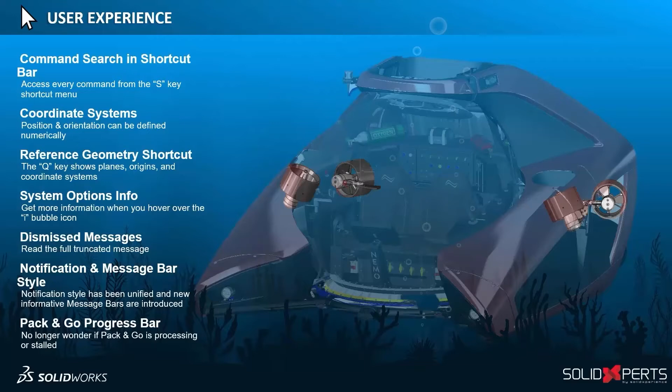We're going to kick it off with our very first topic, which is user experience. There are a bunch of good enhancements for user experience, but most of it is focusing on ease of use, frequently used functions or shortcuts, and providing the user with more useful feedback.

With recent improvements, SolidWorks 2022 helps you be more productive with thoughtful user experience enhancements. As we had seen before, the Nemo submersible isn't complete without all 4 thrusters mated in place.

In SolidWorks 2022, the command search is now integrated into the S key shortcut menu rather than the top right-hand menu. Additionally, if you click the eyeball, it shows the exact feature location.

In this example, the position and orientation of the thrusters has been precisely calculated, so mating to a coordinate system would actually be a really good strategy. In SolidWorks 2022, coordinate systems can also now be defined using specific numeric values, which makes the placement of the second thruster on the bottom right much easier.

At this time, origin visibility is currently turned off, to reduce overall clutter on the screen. But with SolidWorks 2022, the new Q key keyboard shortcut allows you to quickly turn on the assembly or component reference geometry, such as planes, coordinate systems, and origins.

It's also worth mentioning that coordinate systems have visually and functionally changed as well. Their axes, planes, and even the point itself can now be used to create sketches, section views, and more.

In this case, the thrusters need to be mirrored, and commonly used tools like Mirror are conveniently added to the shortcut bar with one click. The new Q key shortcut also works while creating features.

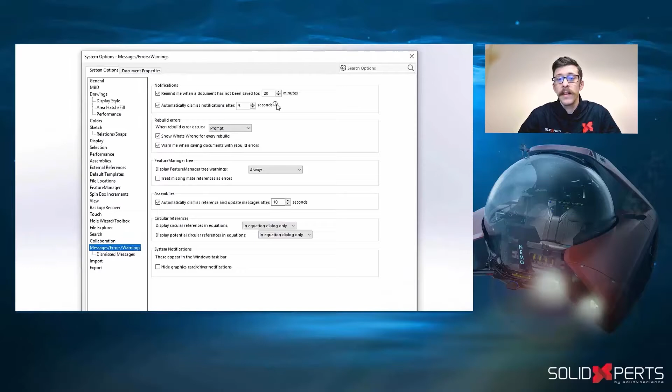You might have seen this before, but the dismissed messages have always been easy to show again, but were sometimes truncated or shortened. Now when hovering over an item, it reveals the whole message, making it much easier to determine if you'd like to show it again. Notification pop-ups like this reminder to save have also been unified in style and appearance.

When you need to collect a project and all of the reference components, the best tool for the job is Pack and Go. In 2022, you can now see a progress bar giving you an indication as to how long the process will take, which is especially useful for those larger assemblies.

And there we have it. As SolidWorks has emphasized, the most user-friendly 3D CAD software in the world is now even easier to use with these valuable additions to the user experience.

As mentioned in the video, the notification and message bar styles have been unified. So you can see the style of them now looks similar. They don't look so out of place. There are also some new messages.

The ones that we're pretty familiar with are things like save reminder - the document hasn't been saved for 20 minutes - or add-in loading performance, maybe you have CAM or another program that is going to take additional time to load.

We're pretty familiar with those, but there are new ones, or at least new to me, like solids and surface bodies - the data migration tab might help you edit this model. Or even the graphics body - the mesh modeling tab might help you edit this model. That one I know for sure. Graphics bodies are actually far more useful than you think, and the mesh modeling tab is a good enhancement. I would definitely recommend trying that.

Now we do have a couple other topics to cover. Hybrid modeling is going to be our second topic here, and when we look at hybrid modeling, it's now focusing on using more than just native SolidWorks data. It's now incorporating other file formats, and rather than just staring at the obscure BREP data or those mesh files that you have, you can use it as a reference and actually start modifying and using it within SolidWorks. Let's get into our next slide and show a quick video.

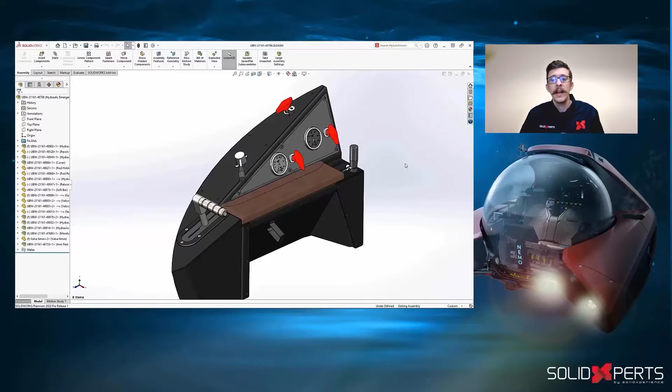Let's talk hybrid modeling. Designers require the ability to create manufacturable products using an ever-increasing variety of file formats. Now, SolidWorks 2022 makes this easier than ever with new enhancements for mesh BREP formats and tools that help you view and edit critical product information.

Now let's take a look on the top here. This ball valve on top is equipped with a lockout tag feature, which is perfect for this control panel, but the handle is too plain to be incorporated into a luxury product like the Nemo, right? I mean, this is some fancy stuff.

The particular supplier provided their files for the valve in mesh BREP format. In SolidWorks 2022, working with these files is just like working with native geometry, thanks to the new hybrid modeling capabilities. Creating features like chamfers, extrudes, reference planes, and more no longer require intermediate bodies or Boolean operations. It is now direct.

Now, in this case, the handle needs a slot for a lock, and new in SolidWorks 2022, the hole wizard slot length can be defined by arc tangents or centers. And when positioning the slot, the tab key toggles between vertical and horizontal orientation, so this is nice and quick, it's much easier.

Manufacturing the handle will also require a draft, and using bidirectional parting line draft would be the most appealing, and in SolidWorks 2022, you can now create draft in both directions when using a parting line, rather than having to create two separate draft features.

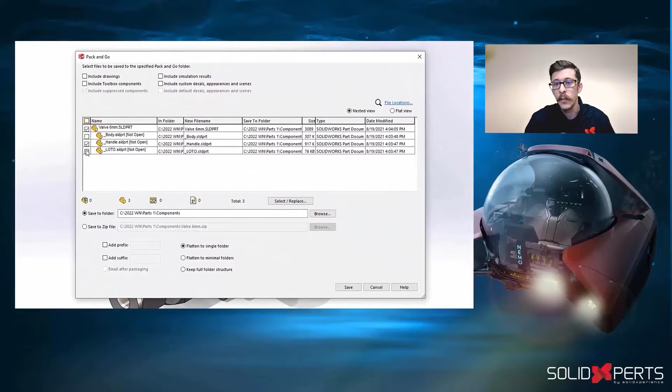Now, if we look at this mesh file, it contains 3 bodies, but the manufacturer needs access to the individual components. Now, in SolidWorks 2022, Pack and Go recognizes the references created when using the save bodies and split part commands. This way, you can choose which files you want without having to find them manually in Windows Explorer, which we know can be quite tedious.

Now, let's talk about section views. Section views are a great way to inspect components, but sometimes a suitable plane doesn't exist. Again, in 2022, you can now specify a section view from any cylindrical face, conical face, or axis.

Now, let's look at the part here. These are 22mm cut threads and are useful for rapid prototyping, but it's too much detail for higher volume manufacturing and would make the file large and complex.

However, the new stud wizard automatically recognizes the diameter of the boss, but still provides a list of different thread sizes and pitches to use. You can even create an undercut with full control over the dimensions and add cosmetic threads, and they can eventually be called out in 3D annotations or 2D drawings.

Again, good enhancements. In SolidWorks 2022, configuration-specific properties have been separated into 2 tabs, configuration properties and property summaries. In the first tab, property information is added just like you expect, but now you can choose which configuration they're applied to using the drop-down menu. And the properties summary tab provides a useful way to compare configurations based on a custom property.

Now, let's be honest, designers sometimes have no choice of the files they're going to receive from a supplier, but still need to support the design process through several different manufacturing methods. And again, that's why we like SolidWorks. SolidWorks 2022 provides the tools you need to get the job done fast and efficiently, while providing improved visibility to critical product information.

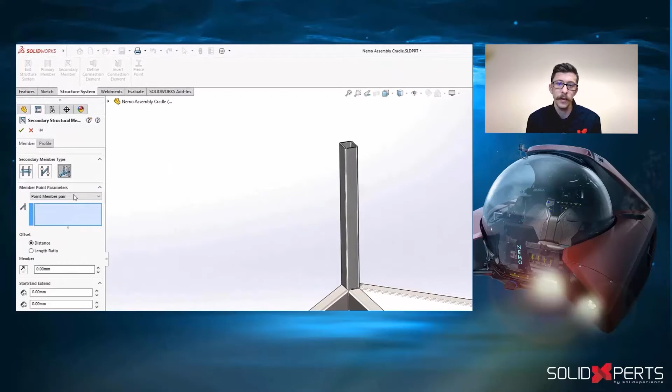SolidWorks makes it easy to create frames and structures with structure systems. Originally introduced in 2019, there is now a number of enhancements to secondary members, the introduction of connection elements, and more. Secondary members are defined using existing structural bodies, and this vertical post will be carrying a heavy compressive load and bending load, so it will need extra supports.

Creating multiple secondary members is fast in SolidWorks 2022, now that you can select a point in multiple bodies. All corner treatments are just as intuitive to define as they have been in the past, giving you full control over the end result.

Also new in SOLIDWORKS this year is the ability to define or insert connection elements. These are great for members that are designed to be bolted rather than welded. In this case, these legs right here require a base plate so that the cradle can be attached to the floor. Just select the member and the plate is automatically centered at the end. If the connection element doesn't meet your design needs, it can be adjusted on the fly.

These forklift lifting channels may need to be replaced if damaged, so a connection element is perfect for the situation. Defining the position of the connection element is easy. Simply select the faces of the members, then use the convenient member planes, which reveal themselves automatically, to center the element. The connection element is smart and can cut predefined holes in the members you select.

Gussets and end caps are also now supported for structural members in SOLIDWORKS 2022, and are just as easy to define as before.

Mirroring features and components is a very commonly used function, and now in SOLIDWORKS 2022, you can mirror across two planes or faces. No longer will operations like this require two separate mirror features. So for mirroring from front to back and left to right, you can now do that with two planes.

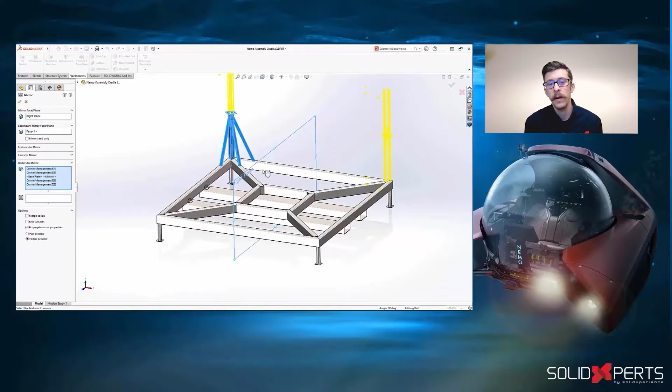In SOLIDWORKS 2021, they introduced the ability to create an edge flange on the circular edge of a non-planar base. But in 2022, this has been improved to allow you to edit a flange profile directly inside the property manager, so that you can specify the exact flange length you want.

And as we know, Structure Systems is a very powerful but flexible tool. With these new enhancements to secondary members, connection elements, mirroring, and sheet metal, creating frames and structures is easier than ever.

All right, that concludes Structure Systems. So we have covered user experience enhancements. We've also talked about hybrid modeling and the enhancements to Structure Systems. At this time, I would like to introduce my colleague Renee Forcier, who is going to teach us all about cloud modeling.

Thank you, Greg. In this next couple of slides and video, we're going to be talking about cloud modeling.

Innovation is the essence of product design and could be your company's biggest competitive advantage. It requires creativity, agility, and the ability to churn through concepts as quickly as possible. Parametric surface modeling delivers on creativity and agility, but the process is time-consuming, requires a rare level of expertise, and requires thorough planning.

Subdivision modeling, on the other hand, is spontaneous, requires minutes of training, and changes can be visualized in real time. Available on any device with an internet connection and compatible with your existing SOLIDWORKS workflows and tools, this tool meets every product designer's needs in one toolbox.

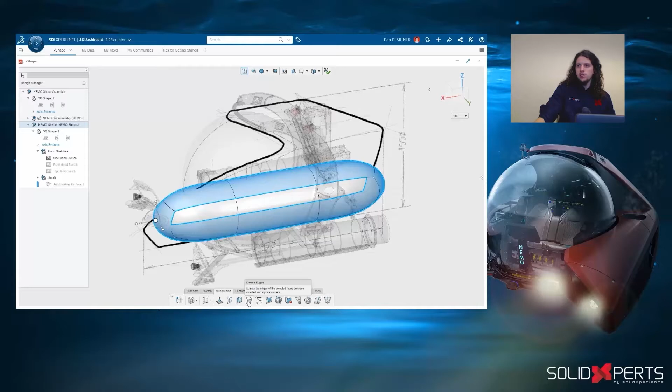By default, all of the faces on our shape have a C2 level of curvature continuity, ideal for any industry of product design. However, select edges can be creased at any time to enhance the style. In this case, by dragging the slider, Dan can adjust the smoothness factor applied at these creases. Because X-Shape runs in a browser, Dan is able to design on a tablet and can swipe his pen or finger across the screen at any time to influence the top row of vertices.

Now we can switch between orthogonal views to make it easy to size, shape, and position this first sub-D bottle right where we want it to be in relation to our frame.

The robot can then be repositioned onto an edge. This way Dan can precisely control the direction of his translation. Precision can be applied to the length of his translation too, as an on-screen ruler appears to snap to an exact dimension.

Once one side is done, Dan's ready to move onto the hood. To add more material, he can slap a virtual chunk of clay using the extrude command to the top of this body.

Once he's extruded that chunk of clay on top, he can pull the faces over the center plane. That plane can be used to apply symmetry, and as long as the symmetry option is active, all modifications will be replicated to the other side of the part.

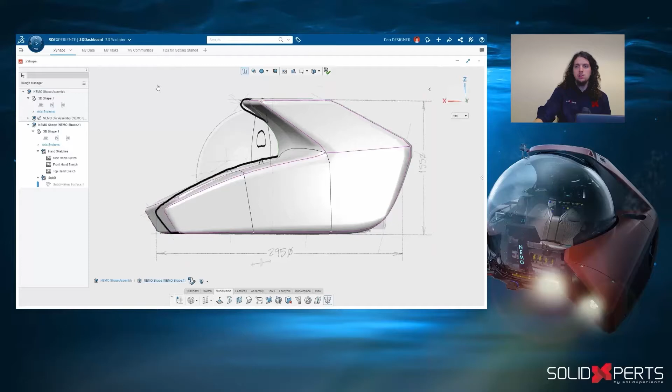To ensure the hood of the Nemo is perfectly flat, Dan can align the entities to a line, moving its endpoints with translate, and scale the entities while snapping them to a perfectly horizontal orientation.

Now that the general shape has been roughed out, Dan can focus on a few finishing touches before sending this out for review. Here he'll add two additional horizontal loops to the midsection to make way for a hole that will travel through it.

Because loops are such a common command, they're easily accessible from the in-context toolbar, a user interface feature every SOLIDWORKS user can appreciate. The vertical loop will provide a boundary for the hole in the back, as well as a scoop on the bottom to create the hole. The bridge tool can be accessed from the context toolbar while two opposing faces are selected.

In minutes, Dan has enough detail to share his concept with the rest of the design team. The sub-D modeling capabilities of X-Shape provide the fastest way to conceptualize in 3D, and considering the amount of information communicated by a single 3D model, it's arguably faster than sketching on paper.

But what about SOLIDWORKS? What happens when the reference frame assembly is modified? Let's check in with Don as he continues to make progress on the desktop connected to the 3D Experience platform.

All of Nemo's design team's data on the cloud is accessible directly in the SOLIDWORKS task pane. To ensure Don's changes aren't overridden by a collaborator, he can reserve files that he plans to modify, as we'll see in a moment.

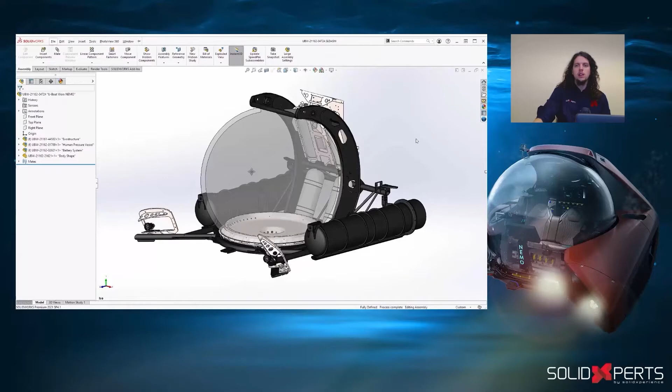Searching through their entire database takes seconds before he finds the components he's looking for, then all it takes to add them to his assembly is a simple drag and drop.

After adding the propulsion system and hatch assemblies, he's ready to save his changes. Just like that, all of his modifications are securely stored to the cloud, accessible to anyone with proper permissions anywhere in the world.

Curious about Dan's progress, he can perform another search for the body design. Even though it was designed in X-Shape, Don can drag it right into his SOLIDWORKS assembly and do a quick visual check on how his recent additions might influence Dan's design.

By activating Preview in 3D Play, Don can sketch some annotations to indicate the adjustments needed to account for newly added components. Then he can post them directly to their private design team community for Dan to see.

Even though Dan still has some work to do, it's not too soon for Don to add some SOLIDWORKS features to the body. X-Shape geometry comes in as flawless watertight solid, ready for extrudes, fillets, shells, ribs, and any other features necessary to prepare this product for manufacturing.

The 3D Experience platform unlocks many new capabilities in applications like X-Shape, and they're all capable of collaborating with SOLIDWORKS. The best part is they now enable hybrid workflows, allowing you to stay in sync while working concurrently.

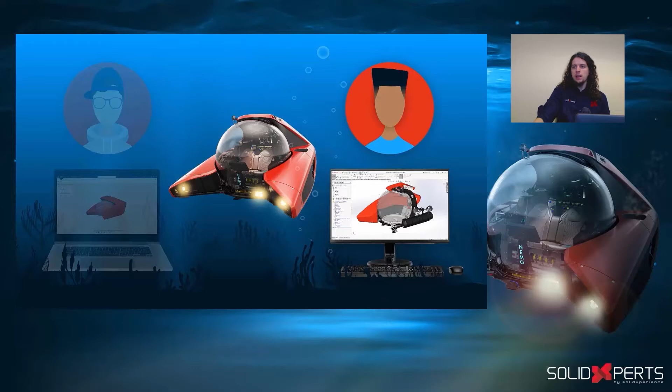Designing in X-Shape can go far beyond the concept stage. Let's drop back in with Dan as he revises and finishes the body shape to the highest level of precision.

As Dan's working in X-Shape, he receives a notification for Don's post. By clicking it, he'll be able to go directly to their community where he can review the proposed changes and let Don know he's working on it, as well as do a quick refresh of the frame assembly.

Once the refresh is complete, the frame is up to date with Dan's last design changes. The exact same assembly structure that exists in SolidWorks is visible in X-Shape, so Dan can start strategizing about his changes. To keep the design tree organized, Dan creates an ordered geometrical set to house his reference sketches.

By converting the outer diameter of the hatch opening, he'll have a clear view of the edge he needs to blend the opening of the hood to. Rather than adding a loop of vertices surrounding the entire perimeter of the body, Dan can localize groups of entities with a subdivide command.

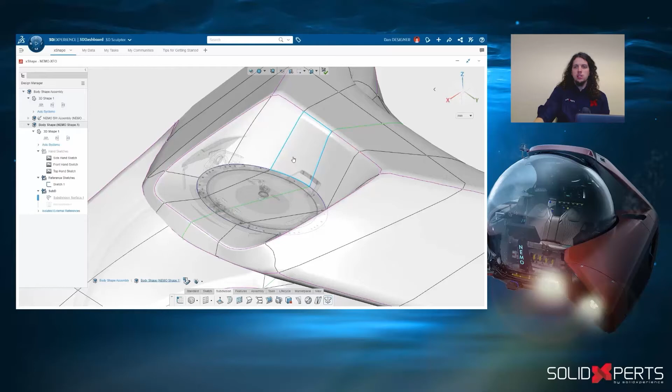Now that he can select a new loop of edges on the hood and the corresponding edges of the hatch, magically, the Align to Curve command perfectly aligns Dan's X-shaped geometry to Dan's SolidWorks assembly. Just like style splines in SolidWorks help to parametrically control splines, the cage view in X-Shape reveals the underlying constraints driving the curved surfaces, making it apparent when edges are out of alignment.

After selecting the vertices in sequence, Dan can easily align them to each other. The side view reveals that the front faces of the hood are also out of alignment. Once selected, they can be made coincident to each other from the context toolbar, just like mates in SolidWorks.

To hone the angle of the front faces, Dan can select the entities and reposition the robot to the pivot point. If the face required a specific draft angle, Dan could snap the on-screen protractor to dial it in perfectly.

To leave the coincident faces undisturbed, Dan can once again reposition the robot accordingly. Dragging the webbing of the robot will ensure that translations maintain the coplanar alignment of the faces.

After a few more adjustments to the hood, Dan is ready to tackle the pathways on the side of the design for the thrusters. He'll prepare a set for each one, not just for organization, but also to serve their dependency on the order they exist within the design tree.

Using the cylinder shape and automatically creasing each end will make it easy for Dan to locate the first pathway in relation to the vertical thruster.

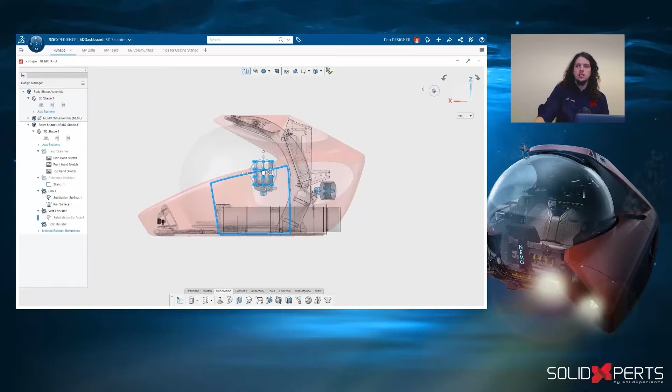In a similar fashion, Dan duplicates the process of modeling the negative space required for the horizontal thruster. There are now three separate solid bodies that can be combined to form the final shape.

Similar to SolidWorks, the combine feature has multiple options for Boolean operations. The subtraction looks good, but Dan also notices the intersection between the vertical and horizontal pathways is a bit too high.

To remedy this, Dan will need to lower the vertical pathway. Because each body was placed in a separate set, Dan is still able to see the horizontal pathway even though it exists below the vertical pathway in the design tree.

This allows Dan to predictably position the vertical pathway in relation to the horizontal pathway with no trial and error. This looks perfect. Taking one final look at the overall shape, Dan's job appears to be complete.

We will now be jumping back to SolidWorks. The model has been updated, and Dan has made further progress on the frame, on the parametric features. He's even split the body into multiple components using the master modeling technique. It won't be long before this project is wrapped up.

X-Shape provides an unlimited amount of design freedom and flexibility, but you can use it to design much more than a concept. When necessary, it's capable of precision fit for any downstream operation. The sub-D modeling environment is one that every product designer can benefit from.

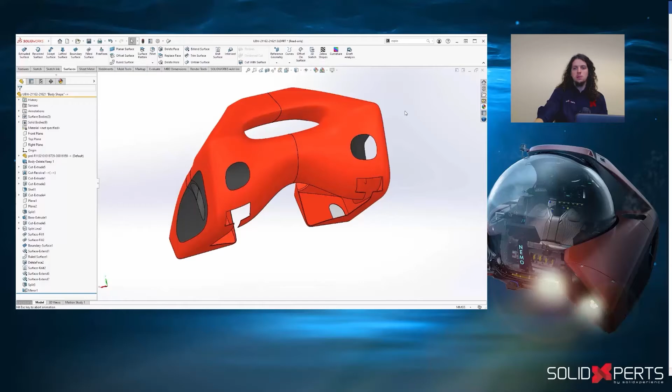There's no installation required, almost no training necessary, there's no faster way to model complex geometry, and there's certainly no reason not to expand your design capabilities with this great new tool.

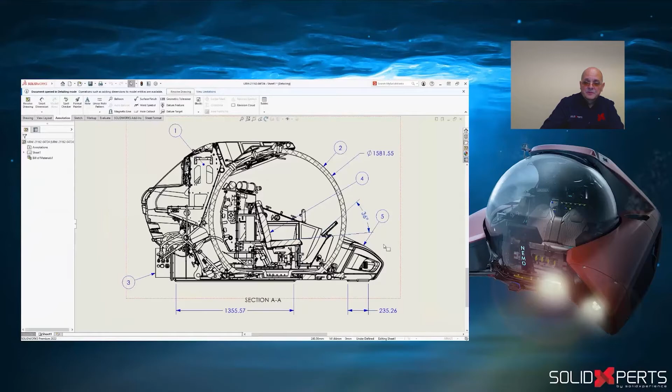Also from improvements here, on the feature tree we can choose to open any of the sub-assemblies in any mode we like, be it large design review, lightweight, or fully resolved. And later on, should we change our mind, we can absolutely activate fully resolved mode at any point. SOLIDWORKS 2022 makes it easier to work in as efficient a mode as possible, no matter how you start out working in your assembly session.

Similarly, in SOLIDWORKS 2022, assembly features are also improved. Mates, patterns, and configurations are all easier to use than ever before, with more functionality and less clicking by you, the user.

Here, with our Instant 3D turned on, it is much easier to manipulate one of the components, even though it's obscured by the other pieces in the assembly. Once we start clicking and dragging it, we can see the motion triad, and we can reorient it in any angle or orientation we choose, easily from the left and right mouse buttons.

Also, upon mating it, the Smart Mate toolbar or Quick Mate toolbar has more complete options so that we can do everything right at the mouse cursor, even adding lock concentric on these particular items. With a control drag, taking another copy of that stud, we can now move it into position and again orient it however we need and fully lock it down as needed.

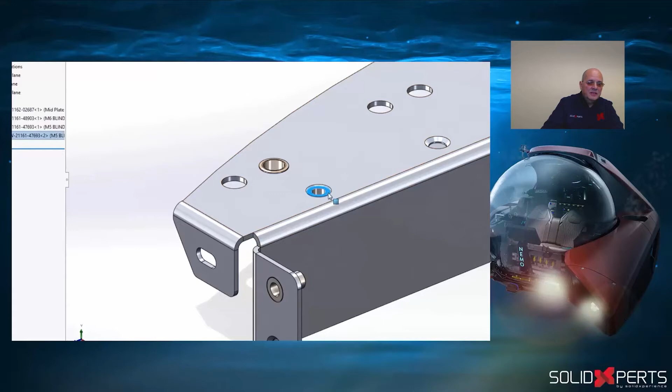Also, when it comes to pattern-driven component patterns, they're even more intelligent than they ever have been before. Here, it automatically interprets the appropriate seed position and finds the remaining instances and where they should go. Even if we relocate this particular component to one of the other instances of the feature pattern, the component pattern automatically adjusts and corrects itself for the seed position. Similarly, on our countersunk fastener, it works the same way.

Configurations have always been a powerful feature of SOLIDWORKS, and in this assembly or subassembly case, we have configurations not only of the subassembly itself, but also several of the key components. And the myriad of choices that become involved could get quite time-consuming to maintain and categorize.

Now for SOLIDWORKS 2022, we have the best of both worlds, combining design tables and configuration capabilities into a new configuration table element. This configuration table automatically picks up on the existing configurations and, with a few simple clicks, allows us to create a complete new variation of that config without having to activate or do anything else.

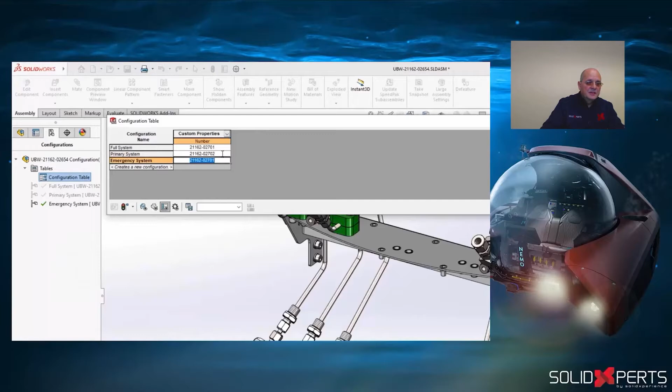Even if we choose to make manual changes to a particular config, whichever one happens to be active at the moment, those changes in turn automatically populate themselves into the table. Also, for configuration tables, we can filter by specific items, and in this case, make sure that each configuration has its appropriate part number.

Similarly, when looking at bill of materials, there are often cases where we might have specific items, particularly pieces formed at assembly, that should not show up in the BOM. Previously, you could always go in and, component by component, tell it not to be in the BOM table. But now in SOLIDWORKS 2022, we have a new configuration option at the component level to determine that it should never be applied to an upper level BOM.

SOLIDWORKS 2022 makes it much easier than ever before to deal with large assemblies and variations of large assemblies in your software, giving you more time to design and less time to worry about how the aspects of the software work.

One note about the Quick Mate system: there is a system option that needs to be activated to turn on some of those additional options for locking and setting your particular mates.

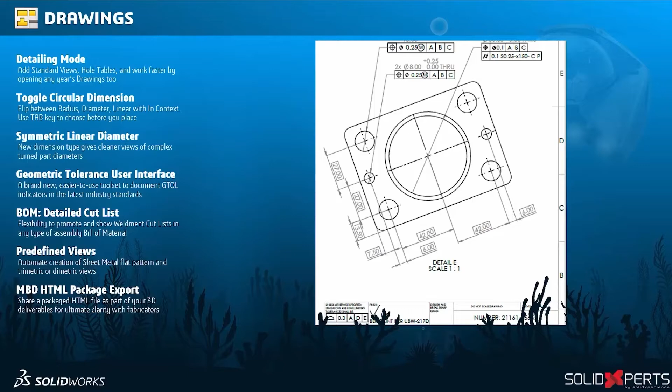As alluded to previously, drawings also get significant enhancement in SOLIDWORKS 2022. Detailing mode continues to evolve, and new types of dimensions and bill of material options have been added this particular release.

For the Nemo submersible, companies like U-Boat Worx need to make their drawings as full detail with the least amount of effort as possible. Here in detailing mode, the full assembly is well documented, even with shaded views and more. We can bring in additional notes, even in this detailing mode, and choose to edit those notes, adding extra intelligence to our drawing.

Adding a few missing balloons and realigning them is easily done, with none of the solid body information being required. Even addition of tables and stuff from existing views works just as you would expect, even if you had the drawing fully resolved.

Older drawings can now open directly into detailing mode in SOLIDWORKS 2022. This replaces the prior detached mode of earlier releases and gives you all the functionality that detailing mode can bring.

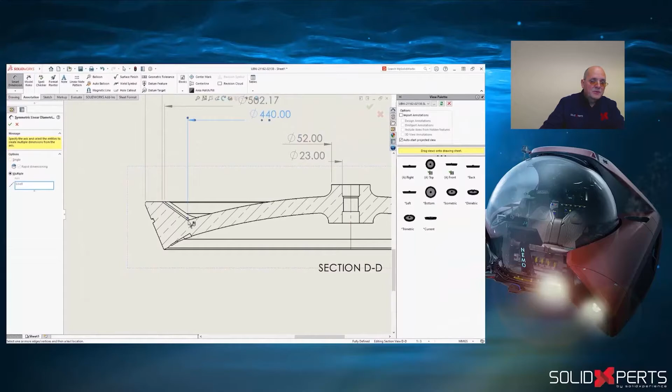The in-context toolbar for drawings is also improved, in this case allowing us to alter our diameter dimension style directly on the fly, not needing to refer to the property manager. On a large turned part, symmetric linear diameter dimension gives us a clearer overall picture with less leader lines and so forth, making for a much tighter drawing view.

Geometric tolerancing has been completely reworked for SOLIDWORKS 2022. We get an in-context property manager right at our mouse cursor, allowing us to build up the frames in full detail, section by section, from symbol to tolerance to material conditions and datums, all interactively on the fly right at your mouse cursor. This will make it so much more efficient to add good geometric tolerancing into your drawings with less time.

In this frame assembly, we actually have a series of weldments fastened together. Each one has its own very detailed cut list. However, in this particular case, it would be nice to have all these combined at a subassembly level type bill of materials. Now with SOLIDWORKS 2022, we can do exactly that with the combined roll-up of those details.

Predefined views have always been useful in drawing templates, and now for SOLIDWORKS 2022, sheet metal flat patterns are available as a predefined view type that you can put in your drawing templates.

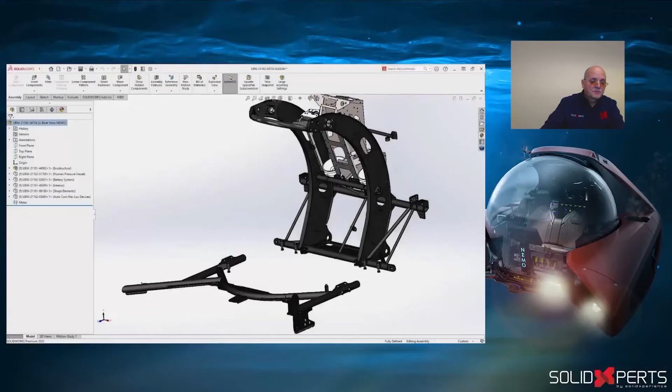SOLIDWORKS 2022 makes it easier than ever before to fully document even the largest assemblies in all the detail required to make good manufacturing work done.

As I've noted before, detailing mode really does completely redefine what an actual drawing view is, and even for less involved assemblies, I absolutely advise you to take advantage of it. The speed improvement is fantastic for what it can do.

An additional note: detailed cut list is now available in SOLIDWORKS 2022 for each of the BOM types, whether it's top level, indented, or parts only.

SOLIDWORKS has long been one of the most capable CAD systems in terms of file import and export, and that tradition continues with SOLIDWORKS 2022.

In SOLIDWORKS 2022, IFC import and export are both improved, DWG and DXF export from files are improved, and overall import performance is much better than previous releases.

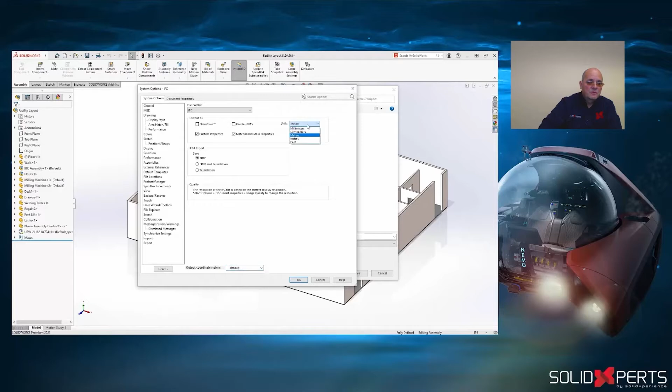In SOLIDWORKS 2022, you may collaborate with a variety of engineers, project consultants, and others not using your CAD system. IFC file format is created with more capabilities, allowing us to set specifics to match our partners' specifications. Similarly, on the import side, now for SOLIDWORKS 2022, we have more options for IFC import.

We can now filter by the various object types that might be in the file, particularly for a SOLIDWORKS designer, perhaps choosing just the floors and walls of a building to bring in and design our equipment around. All of this means that the resulting import and opening in SOLIDWORKS is much faster than it had been in previous releases.

Now with 2022, exporting DXF and DWGs directly from part files is improved, giving us some of the capabilities that were exclusive to drawings before in picking up layers, colors, object types, and more, and properly assigning those to the outgoing DXF or DWG file.

Oftentimes in manufacturing, we'll pick up those DXF files and use that layer and color information to properly suit their needs.

SOLIDWORKS 2022 makes it easier to collaborate with others throughout your workspace, be they partners, your own manufacturing team, or anyone else involved.

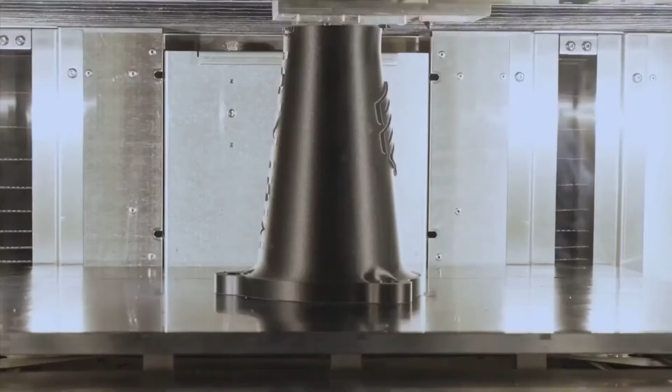Graphics performance has been improving in SolidWorks for the last several releases, and that tradition continues with SolidWorks 2022. Lightweight graphics, cosmetic threads, 3D textures, and silhouette edges all see noticeable improvements with SolidWorks 2022.

At any point in the design timeline, appearance changes can occur. Now in SolidWorks 2022, these changes propagate themselves to the graphical display no matter how the file is opened. In this case, a lightweight component, even though it has just minor appearance changes, switches over to resolved such that those changes are more visibly apparent.

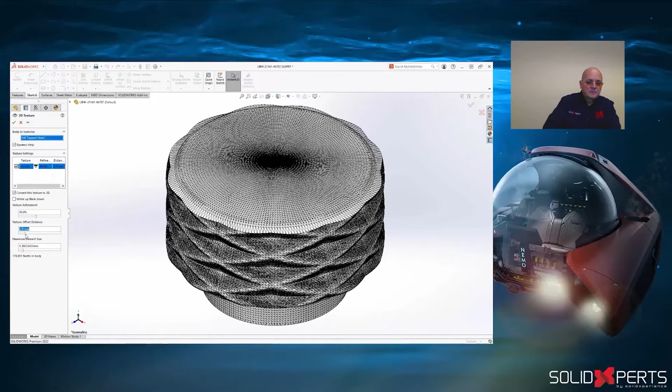Several releases ago, SolidWorks introduced the ability to take a 2D appearance and map it into a 3D texture. SolidWorks 2022 can now very quickly adapt those textures no matter how you choose to modify them, giving you overall better performance in both the 2D and 3D texture modes. These textures are great for 3D printing and other purposes, or even just general renderings.

Also in SolidWorks 2022, the cosmetic thread texture feature is greatly improved. It's a more realistic looking thread and makes use of your graphics performance. Whether those threads are external or, in the case of a hole wizard feature, internal, they look great in either situation.

Also, silhouette edge is now rendered by your GPU rather than your CPU. And so in SolidWorks 2022, the frame rate increases significantly, giving you both better visual and speed appearance as you work with your large files. No matter how you choose to work in SolidWorks 2022, performance will be noticeably faster.

SolidWorks has had administrative images as a deployment scheme for quite some time, and in SolidWorks 2022, the options for these have improved. We have additional image types that can be distributed, nested groups therein, the ability to distribute the vault view directly, and improvements on the electrical install options for your individual clients.

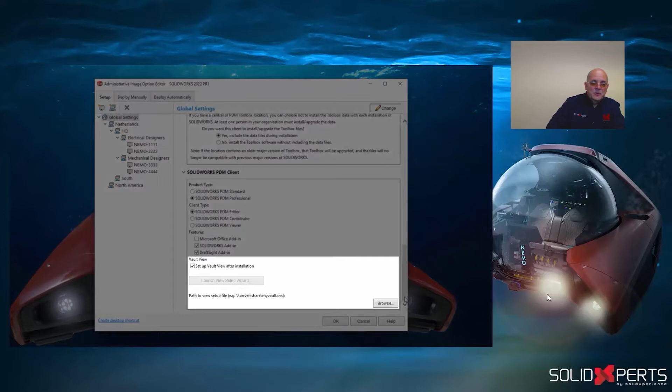In this example, there are a number of utilities that most of the team does not use, and we can clear those off. However, we do want PDM set up, and now for SOLIDWORKS 2022, we can have the vault view created at the conclusion of the admin image install. No more needing additional scripts to run on your own. It's all part of the original admin image.

Also, on the electrical side, it is more clear when you do make the choice now for an admin image as to what setup of electrical that you're actually getting. In this case, the client-only distribution. Many firms have collaborative electrical setups, but otherwise standalone individual SOLIDWORKS clients.

Whether you choose to deploy automatically or manually, both options are still fully supported with the new admin image types. SOLIDWORKS 2022 makes it much easier to create image types that are more suitable to however your team might be working.

In actuality, you've been seeing some of the enhancements for SOLIDWORKS Visualize all throughout this presentation. Everything graphically displaying the renderings of the U-Boat Worx Nemo submersible was in fact produced with SOLIDWORKS Visualize 2022. Let's take a deeper dive into each of those enhancements.

SOLIDWORKS 2022 Visualize allows for a matched camera utility, improved shadow catcher, improved patterning, grouping, and more. For a high-end commercial product such as the Nemo submersible, marketing animations and renderings are key to the sales capability of the product.

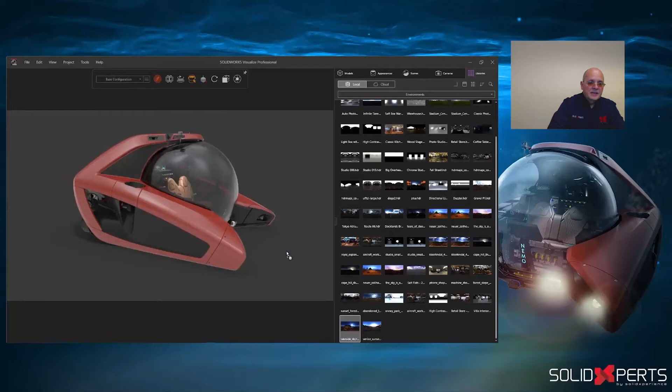HDR environments have been part of Visualize for quite some time. And when we put this scene in around our submersible product, the lighting for the beach scene looks really good, but the background is not exactly appropriate for the use. Here we can find an appropriate 2D image from elsewhere and make that the new backplate for the scene.

Normally, aligning the camera of the 3D model versus the perspective angle of our backplate would be a rather troublesome trial and error process. Now with Visualize 2022, we have a match camera utility, and with a few guidelines to reference the perspective and horizon found in the 2D image, Visualize matches the camera for the 3D model to align with that of the 2D backplate.

Now it's a simple matter of rotating the HDR environment to try to line up visually the shadows of our 3D model with those seen in the 2D image. This works quite well. However, notice that the shadow for the model extends through what would be the wall of the ship.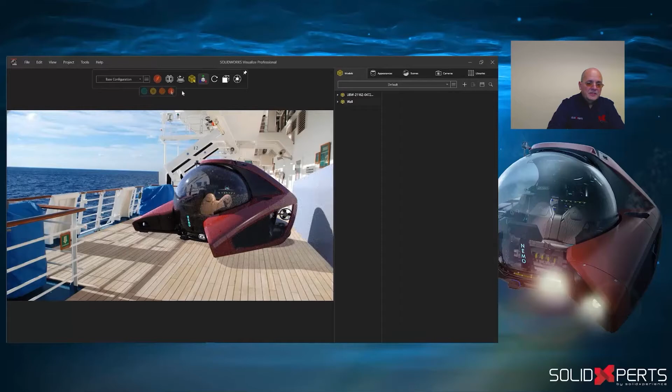Fortunately, in SOLIDWORKS Visualize, we have some reference geometry, in this case a wall, that we can put to catch that shadow. Here we create our primitive, align it, and then position it such that it can catch the shadow, then turn around and enable that as a shadow catcher and hide that geometry from the scene.

The finished result is a nearly ideal merge of our 3D model and 2D scene with HDR environment.

Now, ideally, it's desired to put the Nemo in its destined environment, in this case under the water. And we can easily do that with SOLIDWORKS Visualize by adding a configuration, keeping all those scenes in one single Visualize project.

Here we adjust the lighting thereof, and now we go about populating the scene with some accessory objects.

Previously in Visualize, there had to be at least a couple of instances otherwise defined in SOLIDWORKS or a CAD system to get effective patterns. Now in Visualize 2022, even just having a single accessory object, we can do the patterning entirely in Visualize. In this case, for a school of fish, a scatter pattern is probably more appropriate than anything else. And the end effect looks fantastic.

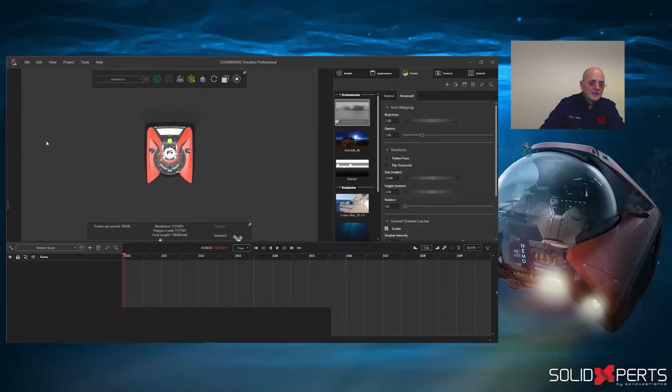Now for the third rendering in our project, we have another configuration. And as we add the cameras, we can start building a timeline of the scenes.

Here we start applying the explodes, and as we do so, additional keyframes get added. Previously, the more objects you had, the more keyframes, and it gets harder and harder to manage. Now in Visualize 2022, we can actually start color coding some of those keyframes into groups that are easily visible on the timeline and easier to control and manage the entire scene arrangement.

Continuing on, we can also populate the timeline with additional cameras. For a more professional effect, up to 3 cameras can be arranged easily to create a full perspective motion of our entire explode arrangement.

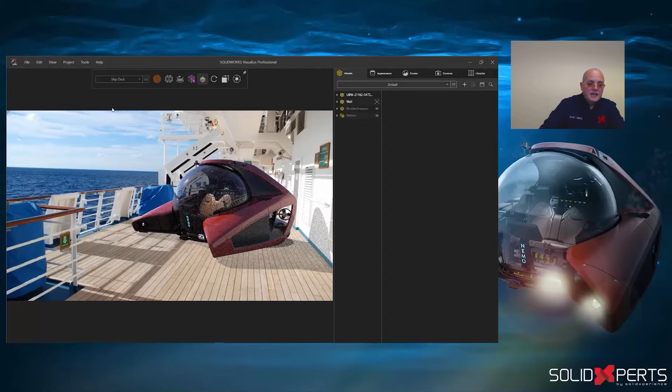With the sequence fully built up and all the cameras added, Visualize 2022 provides us the method to keyframe to each of the 3 cameras as needed, again producing a final sequence without needing any other additional video editing software beyond Visualize itself. Now going back through each of our project configurations, we can set about the task of the final render.

Now that everything looks good, Visualize can proceed on its own to do the rendering for us. Those render settings can be reviewed, and the projects can be canceled if needed. Best of all, the outputs are referenced together in the final project and can be viewed directly as entities in Visualize itself.

With all these enhancements in Visualize 2022, any SOLIDWORKS model, no matter how complex, even to the complexity of the submersible, can be turned into top-notch marketing collateral by anyone with capable SOLIDWORKS skills.

A few additional enhancements for SOLIDWORKS Visualize include better radius support, full display of the new cosmetic thread option from SOLIDWORKS 2022 itself, and the ability to pull in multiple motion studies from your SOLIDWORKS files.

Well, graphics and Visualize certainly show off some of the flashier enhancements of SOLIDWORKS 2022. Serious engineering improvements have also been made, and SOLIDWORKS Inspection for QA engineers and QA technicians is one of the product areas where that is more evident.

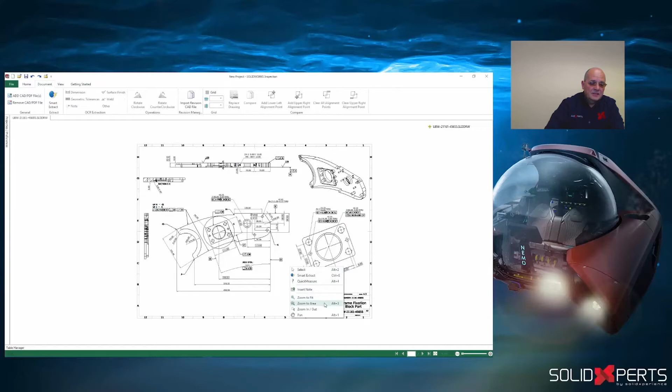Now in the standalone edition, we have the ability for new file types, both Unigraphics and native SOLIDWORKS drawings, no longer needing to do part of the project in SOLIDWORKS and part in the standalone app. Now things can be done entirely in the standalone app if desired.

Here we can use the Smart Extract and pull a lot of the information directly out of the title block, not needing to use the OCR techniques at all. Even the new geotolerance here in the title block gets captured in its entirety, frame and all, with all the relevant information and almost no typing on our behalf.

Similarly, as we scan about the drawing, we can pick up all callouts, the new geotolerance frames, even with tolerances and additional aspects, and it all comes through completely in the new SOLIDWORKS Inspection 2022.

Moving on, we can actually grab it in a single window, getting both of those elements as two individual characteristics in our characteristic list, quantity instances and all the other things that we normally expect to work perfectly well here in the standalone app. But in some cases, not all firms have completed drawings, and Inspection 2022 handles that as well.

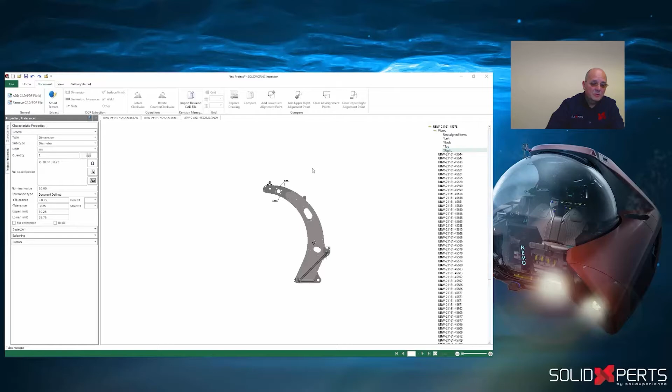For a more model-based engineering type approach, we can pick up these DimExpert dimensions and tolerances completely with the Smart Extract in Inspection Standalone. Even for a weldment type assembly, or any assembly for that matter, we can continue with the same approach.

And for completeness sake, if we're going to stick with the model-based definition type arrangement of model-based engineering, even from Inspection Standalone, we can output that as a 3D PDF, pretty much the same format as came in or would be expected from model-based definition add-ins.

So whether your models are complete, fully documented or not, you can handle it all with SOLIDWORKS Inspection Standalone. On the add-in side, here in SOLIDWORKS itself, a new complete full API has been added, and you can create your own macros to further enhance the automation capabilities and automatic report generation of SOLIDWORKS Inspection 2022.

So no matter what your firm's preferred documentation style is, full drawings, intelligent models, or some mix in between, there's never been a better time to consider adding SOLIDWORKS Inspection for customers that have SOLIDWORKS Premium, or perhaps even the original add-in SOLIDWORKS routing as an independent product. There are significant enhancements to look forward to in SOLIDWORKS 2022.

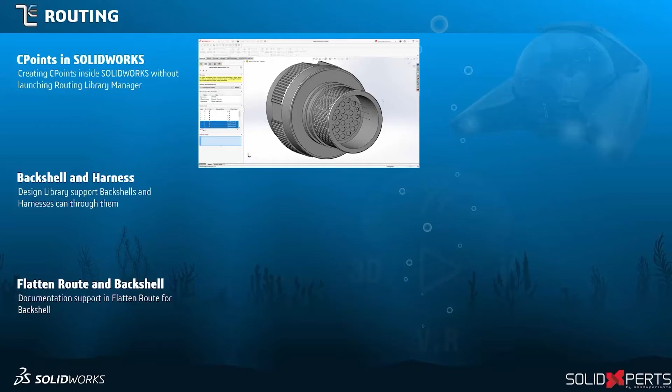With SOLIDWORKS Routing 2022, CPoints can now be created directly in the SOLIDWORKS window itself. Backshells and inline components are now fully supported, and of course Flatten Route now adapts to those inline backshells.

When taking something as sophisticated as the Nemo submersible underwater, electrical and other circuitry are a key part of the overall design. In SOLIDWORKS Routing 2022, we can take advantage of all that electrical information.

Now for this multi-pin connector, we can actually add some of the routing intelligent connection points using the information from the SOLIDWORKS electrical manufacturer part database. Here in this case, we can choose the manufacturer and component desired.

And referencing that data, we can now add our CPoints directly in the SolidWorks graphics window, selecting edges or faces as needed to get those terminals added.

At any later point, we can examine that information and clearly determine which of the pins in a multi-pin connector have been assigned so far. And we can continue on with the design process at any point we choose, adding the missing terminals wherever we want to, or whenever we want to.

More time designing, less time switching applications.

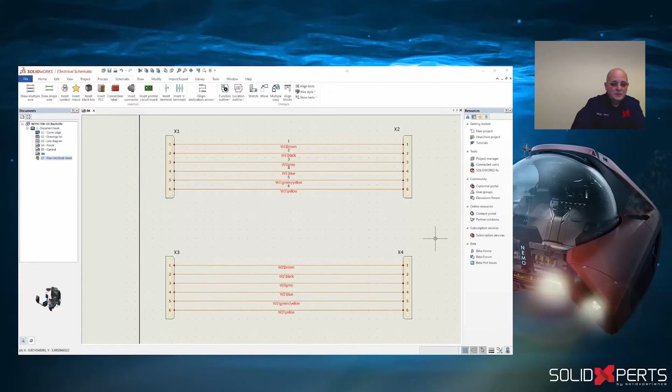Now, for protection of overbending of cables and things of that nature, backshells are often used. And now, even though they're not stipulated in the electrical schematic, we do have them available in the SolidWorks routing library.

Here in the Nemo design, there are actually a few of these routes that already have the backshells added to them. In this case, we're using a 45-degree bend backshell. Going to the design library, under electrical inline components, we can now select a variety of pre-made backshells for us and add those into our routes.

Even for routes that have already been done, we can adjust the route to take advantage of that new inline backshell. Here, even in this case, where the exit of the backshell is not directly collinear to the connector itself, we can adjust the route to handle that. Selecting that back edge, the route and spline updates itself correctly.

Furthermore, when it comes time to producing finished documentation for any of these routes, we can now use the flatten route utility and, choosing either of the routes, show the full flattened arrangement, including the inline backshells.

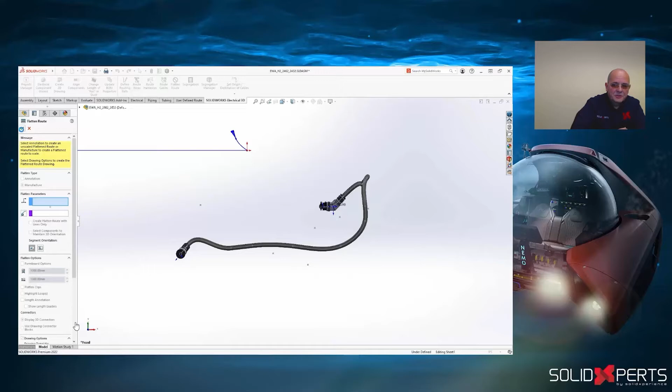In the Flatten Route Property Manager, we can choose the level of detail desired. In this case, the manufacturer part information and the 3D connector information, having it automatically self-generate into our finished documentation.

SolidWorks Routing 2022 makes it easier and more effective to do detailed routings, models, and finished drawings all easily within your SolidWorks. Also in SolidWorks Routing 2022, cable points can be created directly in the graphics window rather than using the library manager, as we saw with connection points, and bend radiuses for both cables and harnesses are improved. Along with the flatten route enhancements that we saw, better handling of external connectors has been made possible, and we can edit the flattened route segments before producing the finished drawing.

And for the schematic side of SolidWorks 2022, there are enhancements to the electrical schematic application as well. There's always been a content portal that we could activate in SolidWorks Electrical, but now it's more integrated directly in the software interface.

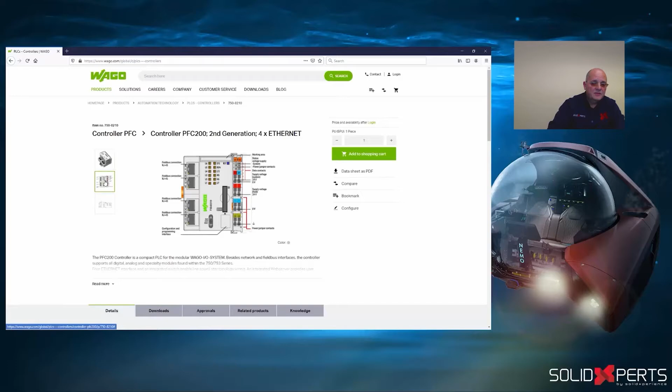Here we're looking at the original content portal, which normally launches just regularly in the web browser, any browser of your choice for that matter. And brands are adding new components all the time and new catalog specifications with additional manufacturer data.

Now in Electrical 2022, we can launch that content portal and have it appear as a panel directly to the right side of the software. Here we can search much like we would in the browser edition, and we can just browse for new content, or in this case, search for the manufacturer Wago as we were showing previously. Coming down to the PLC library, we can see that it has a variety of modules, whether as 2D symbols, footprints, or even 3D parts.

Although it may seem like a small enhancement, having this information directly at your fingertips in one application can make your SolidWorks designs more effective and easier to complete.

Additionally, in SolidWorks Electrical, we now have better control in a multi-user environment with more groups and faster operations. And in the electrical reports, hyperlinks can now reference more than one destination, making it much more usable in terms of referencing both inside and outside of your electrical schematic projects.

SolidWorks Simulation 2022 has a number of enhancements that become quite useful in the design of something as sophisticated as our NEMO submersible.

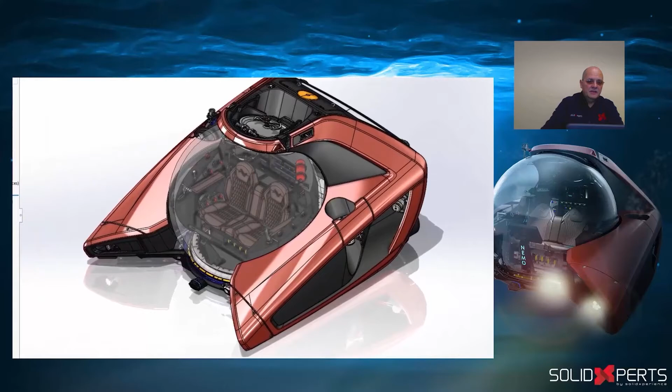Here in our NEMO submersible, there are a number of areas that are important to simulate prior to taking this into the open ocean. The framework of the NEMO submersible has a large number of bonded interactions, and those all solve up to 27% faster than it did even in Simulation 2021.

Now, at the top of our submersible, the important hatch has a hand wheel and linkage over toggle mechanism. It applies 500 newtons of force on the rim to get an adequate seal for diving. Thanks to the cyclic symmetry involved, we can divide that down to 1/3 of the original model and solve on that.

Furthermore, we can take out the purchased linkage rod and replace it with our new virtual connector. That new virtual connector has options for attaching to cylinders or vertices as needed, and we can have our attachment endpoints even be spherical ends, ball ends for the linkage rods as needed.

In this case, we'll specify our 2 pins where we're attached to, and we'll put a spherical end on the end conditions. Furthermore, we can even stipulate the section parameters to get it closer to the actual purchased item that we use.

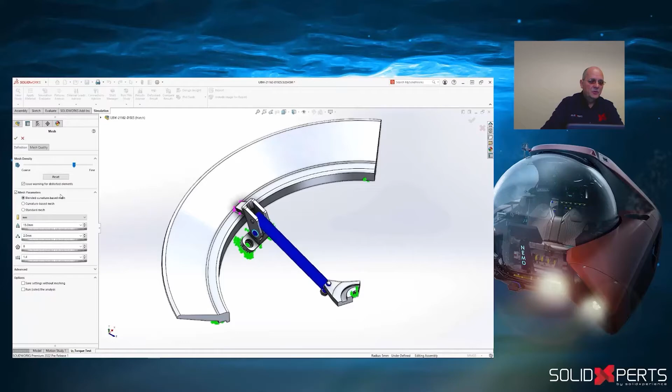We'll apply a torque to represent the action on the hand wheel, and we'll divide the nominal force applied by most people by the 1/3 that we have for the rest of the model. Running the analysis and looking at the results, we can look at the contact force exerted by the finger of the over toggle mechanism.

Now again, our desired minimum was 500 newtons, but this value times 3 isn't quite there yet. So with a choice of a slightly longer configuration of our over toggle bar, we can very quickly rerun the same simulation, examine that contact force again, and this time, with that 10 millimeters of different length in the finger, we are in fact exceeding our 500 newton minimum requirement.

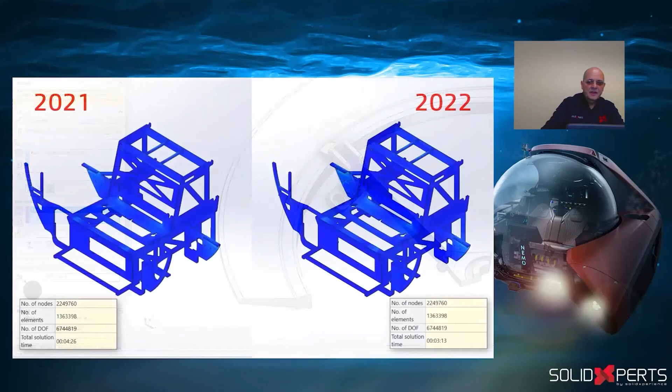All of these things make it much easier to work with in SolidWorks Simulation 2022, allowing you to solve complex designs in record time.

Further enhancements in Simulation 2022 include even better automatic solver selection. The algorithms choose the appropriate solver in 100% of the cases now, and also the beam shear factor calculation has been corrected for SOLIDWORKS Simulation 2022.

Of course, for a vehicle like our Nemo submarine, flow is every bit as important, if not more so, than our structural simulations. SOLIDWORKS Flow 2022 provides key enhancements that will help the development of this vehicle, including a number of improvements in the Transient Explorer, new plots we can use, and new goals we can set as part of our analysis.

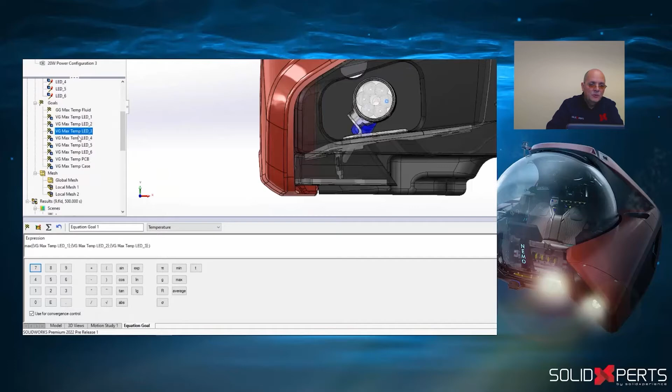Once the analysis is complete, we can use the Transient Explorer to get more insight into how things are progressing through a typical dive scene. In this case, Transient Explorer shows the plots of the power flow and gives us some insight. We can also set equation goals after the fact and use those to calculate a new plot based on other goals already in the system.

We've also run some steady state studies on some experiments, assigning individual power settings to specific bulbs, either left or right side, top or bottom, in specific arrangements rather than the entire set as a group.

Now we can compare results across multiple projects, but oftentimes lining them up side by side really doesn't give a complete story of what's going on. With Flow Simulation 2022, we can combine those with a merge option and look at the min and max of the merged plot, giving us better insight over the total arrangement.

Also, we now have difference plots, and we can compare those from a current project to a reference project and see a baseline across projects. Also, the scene plot has been improved, completely storing all the model orientation, visibility, and other information. Creating that perfect scene captures your display settings regardless of the current model's display condition.

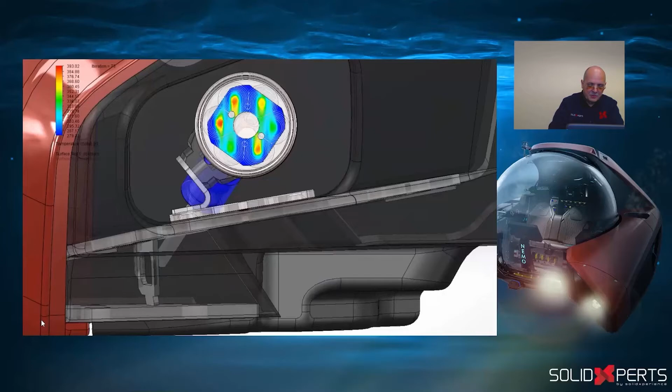SOLIDWORKS Flow Simulation 2022 keeps you in control of all your results and your studies, and makes it easier to evaluate a complete project, no matter how complex the design iterations may have become. It also includes enhancements for the ability to copy probes across different projects, improved geometry checks, finding of missing entities from a study, and improvements in the surface parameter calculation. All of these will be well suited to a craft such as the Nemo.

Of course, a specialized case of flow simulation is looking at the flow of molten plastic through an injection mold and how well it fills that mold to make your finished plastic part. That's what SolidWorks Plastics is all about. New for 2022, we have improvements in boundary conditions, runner creation, the injection mold advisor, and of course we always improve the material database every release.

These improvements and others in SolidWorks Plastics help us in designing some of the pieces that are handholds and other devices in our Nemo submarine. At the top of the sub, on either side of the hatch, there are two handholds, left and right hand, and these are molded out of injection molded plastic.

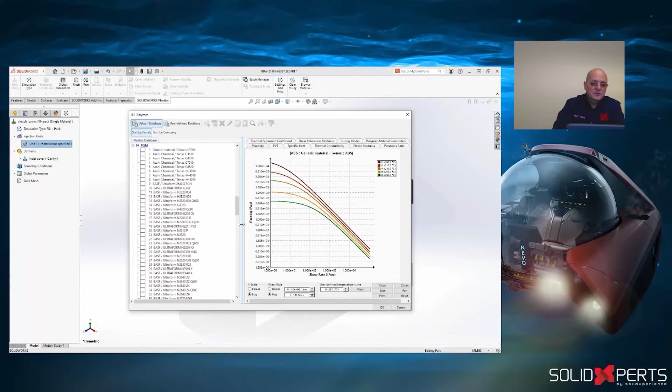In this case, we're going to take a look at one side of that, and we're going to apply one of the materials from our database. For Plastics 2022, there are 100 new materials and improvements to 1,500 other materials, giving more accurate results than ever before. In this particular case, we're going to choose a suitable Delrin material for our handhold.

The new injection location mold advisor chooses the optimum location, and the advisor even indicates the appropriate direction of pull.

In this case, we had already previously set a sketch-based runner, and new for 2022, the controls for creating the runner based on the sketch are further improved. We can merely set the diameters appropriately, and the system helps handle the rest.

Now, our handholds are left and right cases, and we can use a new symmetry condition to produce a virtual mold set, including those two left and right hand versions. However, for a part such as this, it might also be reasonable to create a circular family mold.

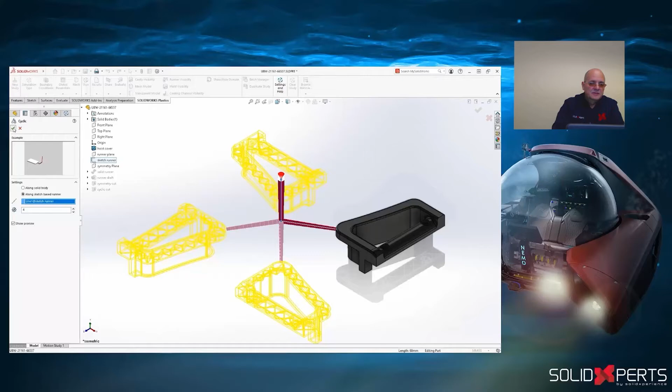With the cyclic symmetry condition, we can do that as well. Picking the axis of the sprue, we can rotate about, creating as many instances as we can possibly fit. And even if we'd chosen to do that with a solid runner rather than a sketch-based runner, both of those symmetry conditions work as well.

Now, when we take a look at the analysis, we can run through the entire scenario, and when we're done, show the results for the full virtual mold case. All of these improvements make it much faster and easier to design better SOLIDWORKS plastics parts and ensure more throughput in your plastic mold designs.

Additionally, in SOLIDWORKS plastics, the solvers are now 20 and 50% faster, and we have better support on the results, particularly when working with higher resolution 4 and 5K monitor screens. These are just a few of the improvements that make using SOLIDWORKS plastics much more efficient than ever before.

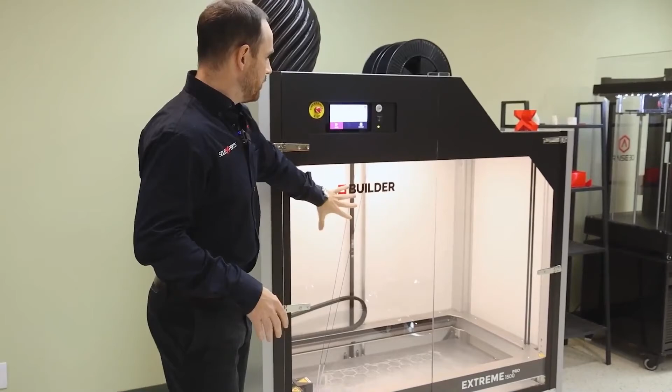This is part of our expansion here at SolidXperts, growing in the fabrication and additive manufacturing space. Here's the first 3D printer on our grand tour: the Builder 3D. Anybody looking to validate parts, large-scale parts, we have that capability now. The great thing about the Builder 3D printer is that we can print parts up to 1.7 meters, so this can provide a lot of your needs.

This printer here is the Builder 1500. We're looking at a width of 1.1 meters, depth of 500 millimeters, and height of 828 millimeters. So any parts you need to validate, or large-scale jigs and fixtures, we have printers at a great price point and accessible. If you want to know more, feel free to reach out to our team, and we can provide more information or a personalized demo.

Now, when we're looking at versatility and rapid prototyping, we have here our Raise 3D printer. Again, a printer that's leading edge in technology, a fraction of the cost of what's on the market right now, and very accessible for any company that's getting started.

You have versatility in terms of material, and also a camera that you can monitor with. You have a large print table here — in terms of height, you can go up to 23 inches, and the depth and width is 13 by 12 inches. So you have a great rapid prototyping machine, industrial, runs 7 days a week, not a whole lot of maintenance, and this is a machine that can really meet the demands of industrial industry needs.

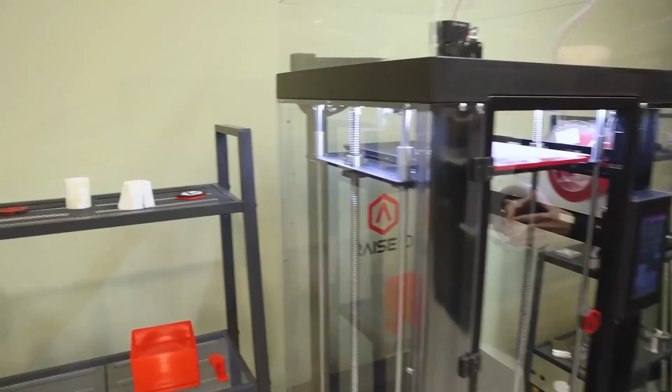Essentially the Raise 3D has very powerful software and a great value added proposition. As you can see here, some fantastic parts were printed in terms of surface finish — absolutely amazing, very accurate, very precise, smooth surface finish. This is done in PLA, by the way, so it gives you a very clear indication of how precise you can get with these printers. If you want to know more, feel free to reach out.

Now we can move on here to our Markforged 3D printers. We've had a partnership with them for 5 years now, and we've seen it grow. This is really for if you're looking for a robust, reliable machine — we have everything from plastic composites that print parts as strong as aluminum. We literally have a metal printer as well that prints parts in copper.

Stainless steel. We also have Inconel, H13 metals, A2, D2 metals. We're really looking into tooling steel and expanding in terms of your 3D printed parts in metal. Regarding plastic composite parts, this is an absolute game changer because you have a technology that can create continuous fibers.

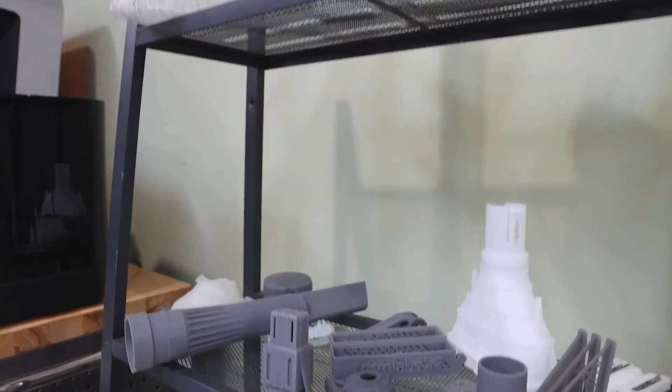With the Formlabs 3D printers, we have this amazing capability of getting smooth surface finishes, accurate parts, whether it's for molds for low production volume. We have that capability with high temperature materials, rigid materials, and elastic materials. We can even cast these parts.

So you have a technology that's manipulated with a UV laser, and it produces end-use parts such as this. So you get a very versatile machine. If accuracy and precision is your need, look no further than the Formlabs Form 3L or the Form 3.

Depending on the size of parts you need, we have a small print bed here for small parts that vary between 5.7 inches by 5.7 inches by 7.5 inches in terms of height. And then we can go up to 14 inches here in terms of print bed size.

Finally, on our grand tour of the Formlabs, we have another technology that's an absolute game changer: the SLS printer. When it comes to SLS technology, Formlabs has really worked on a printer that's leading edge in terms of technology, is a fraction of the cost of what's out there on the market, and creates a reliable part with beautiful surface finishes.

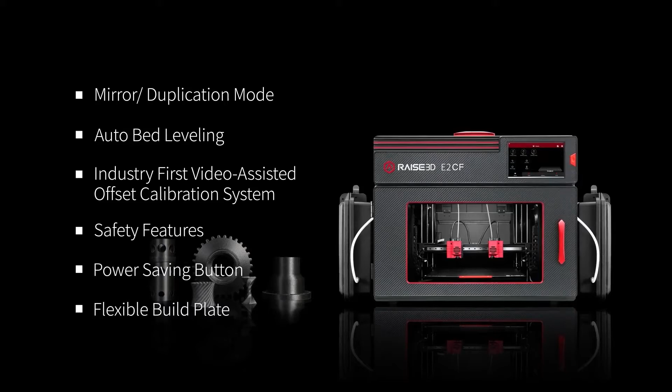It's Renee Force here again, and in this session we're going to be talking about cloud simulation. We'll be seeing how we can leverage our 3D Experience tools when testing your designs. When you test your products virtually or in the real world, naturally you're going to be exploring numerous design options, evaluating how long they will last, and finding out when and where ultimate failure may occur. It's no easy task. When simulating numerous physics and loading scenarios, collecting and making sense of all the data can be daunting and time-consuming, especially when the design and analysis tools are disconnected or limited.

But there is a better way. With the 3D Experience platform, we are providing a collection of best-in-class simulation apps built with industry-leading technology, including Abaqus and FE-Safe, that connect seamlessly with your SolidWorks products.

Adam, an analyst working on our Nemo submarine to help satisfy safety and certification requirements for the battery compartment and skid, has a few remaining tasks before the project is complete. With a depth rating of 100 meters, it is critical that the battery compartment can withstand pressures beyond that depth to ensure safe operation. At the same time, weight and cost must be reduced whenever possible.

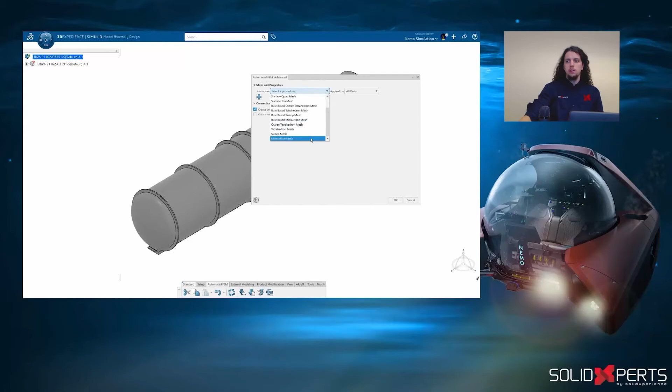Once uploaded to the platform, a mesh is created. The automated FEM recognizes the thin components of the model and creates mid-surfaces and associated shells, meshes, and mesh bodies, all in one command. Next, Adam creates the structural scenario that defines the loads and boundary conditions to simulate the maximum designed depth rating.

At first glance, the results make it obvious the structure is over-designed, so Adam launches the Parametric Design Study app, selects the parameters and goals of interest, and lets the computer do the rest of the work.

Once the study is complete, Adam can easily interpret and compare the performance of the various configurations. The best design is even highlighted for him. With one click, the new model and study using the optimal parameters is created, so Adam can take a closer look. But he has additional tasks to complete first.

The pressure load on the battery compartment happens multiple times throughout the life of the Nemo. Another loading condition that repeats is the impact of the skid when putting the Nemo away for storage. To simulate this secondary loading condition, Adam creates an explicit dynamic study to accurately capture the rapidly changing stress from the landing cycle. How does the skid come in contact with the floor? Well, Adam lets the solver figure that out with one simple yet powerful general contact interaction.

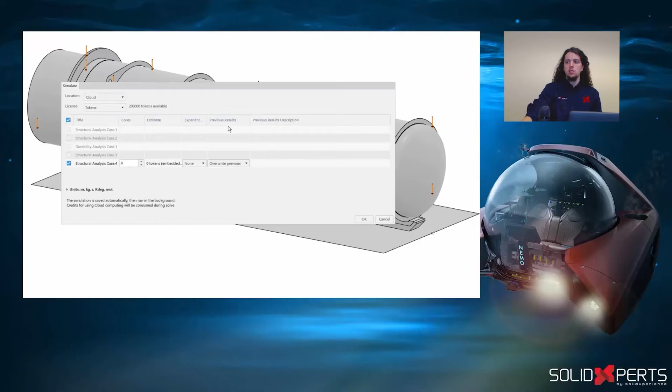To greatly decrease the solve time, Adam also chooses to run the simulation on the cloud. Leveraging its high performance and computational power, Adam can even shut down his computer while the simulation runs. The stress values are within an expected range, but how many times can the Nemo withstand both this and the pressure load?

To reveal the answer, Adam sets up a durability study. He defines the fatigue loading that captures both events. For the explicit dynamic results, he includes all increments to account for the fluctuations in the response. Adam also includes both stress and strain in the calculation to improve accuracy and to solve for both high and low cycle fatigue. Both sequences occur in the loading history, but they are exclusive events, so he turns off the inter-event transition option. Lastly, he defines the base surface finish and solves for the results.

The results are not only available to Adam, but they may be viewed by other collaborators from their internet browser, so everyone can get the latest information instantly from one place. Adam's last task is to identify when and where ultimate failure may occur if the Nemo gets too deep.

Leveraging the same study setup from the first scenario, he defines a Riks buckling setup and goes further than a typical Eigenvalue buckling analysis. This is well suited for an unstable and nonlinear collapse structure and doesn't require setting up a more complex dynamic analysis.

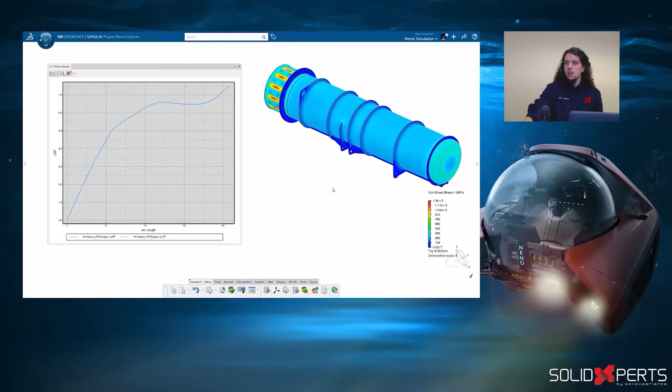Processing the results is simple too. Adam plots the load factor and visualizes areas of the compartment. By using the 3D Experience platform to explore numerous design options, evaluate durability, and understand critical loading events, Adam and his team were able to make informed and timely decisions to help fulfill their safety and certification requirements.

We'll now be continuing into SolidWorks PDM. With 2022, we have the introduction of user presence cards, a more robust use of the eDrawings UI inside of the eDrawings preview, integration with Exalead OnePart, as well as more features when opening drawings inside of PDM.

We've also brought in Active Directory enhancements as well as user profile enhancements for your SolidWorks users. We now have support for detailing mode, as well as we can preview neutral files in Web 2, as well as configure data cards to enhance the user experience when accessing PDM through the Web 2 client as a PDM Pro customer. As we will see in this upcoming video, there have been many enhancements and many UI changes that you'll enjoy using in the future.

SolidWorks PDM 2022 introduces powerful new capabilities to keep your designs on time and on budget, while keeping your design teams organized and informed. With tight timelines, it's critical to know what your teammates are up to.

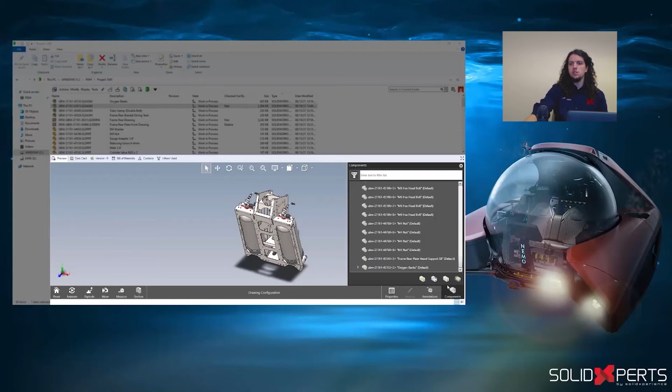New for 2022, transitioning from the bitmap preview to the eDrawings preview is now more discoverable with the help of a dedicated button. Interrogating your models is now easier than ever with eDrawings desktop UI fully embedded. This familiar interface allows access to commonly used commands like the measure tool with all of its options. It also provides full access to the component design tree, allowing you to cross-highlight between model geometry and the component list.

Keeping design costs in check is a fine balance between designing from scratch and reusing past designs. For example, we need an ultralight deck plate for this new design. New to PDM 2022 is the ability to incorporate your licensed Exalead OnePart environment into PDM Pro.

Exalead OnePart is a powerful search and discovery application that allows you to gain deep insight into your vaulted data. OnePart not only presents you with the results, but also highlights parts that share a 3D similarity. Selecting 3 components allows us to compare them side by side in order to find the part with the least amount of weight. With the part identified, a simple click of the button opens it in SolidWorks, allowing us to complete the assembly design while avoiding the cost of creating a duplicate part.

No design is complete without ensuring the drawings are updated. New to PDM 2022 is the ability to use the Open Drawing command regardless of what the drawing is named or where it's located in the vault. This command has been added to the right mouse click menu in the PDM add-in, allowing you to quickly access component drawings as well.

As an admin, bringing new users into PDM is now easier than ever. The users and groups nodes have been consolidated, making them easier to find. The user property card has been updated as well. For Active Directory users, the profile picture will now also be imported directly from your Windows Active Directory, and there are now more user fields available, making it easier for properties to be mapped over. On the group property card, administrators can now overwrite the Windows group name with a more descriptive name, making it easier to identify in the tree.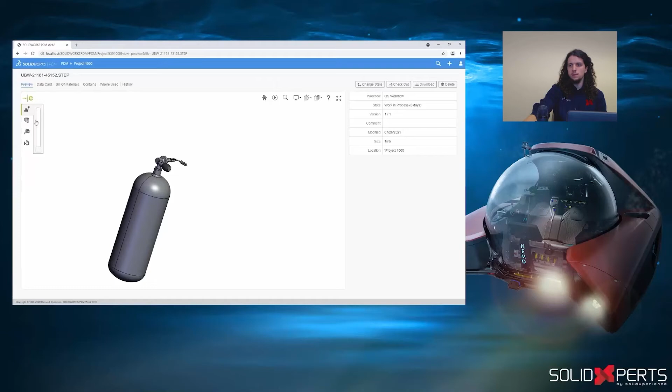Receiving supplier designs in the form of neutral formats is an easy way to expedite the design process. New for Web 2 is the ability to fully preview these formats, such as STEP, IGES, and Parasolid, and they can be viewed directly inside the web browser.

Also new for Web 2 is the ability to customize your data card preview. Removing properties like project name and project number from the card view is now easily accomplished in the administration tool. An option called Show in Web Card is available for each property control on the card.

Additionally, a dedicated web card editor has been added. This tool allows you to rename fields that otherwise would have displayed the variable name. The layout of the card can be toggled to tree mode, allowing admins to drag and drop properties where they would like. Once saved, a simple refresh of the browser updates the view.

With new user controls, search integrations, and previewing capabilities, SolidWorks PDM 2022 provides you the tools that you need to maximize your productivity while keeping your files secure.

Now, with the advancement of some of these options, we can see here that when we're working with our AD advanced options, we're now able to search based off of partial names, so no longer needing to know the exact login name of a user or a group that you wish to add.

We can also see our tool where we're able to edit the name of the engineering group so that we're not forced to use the US Central Manufacturing Engineers name that your Windows Active Directory understands.

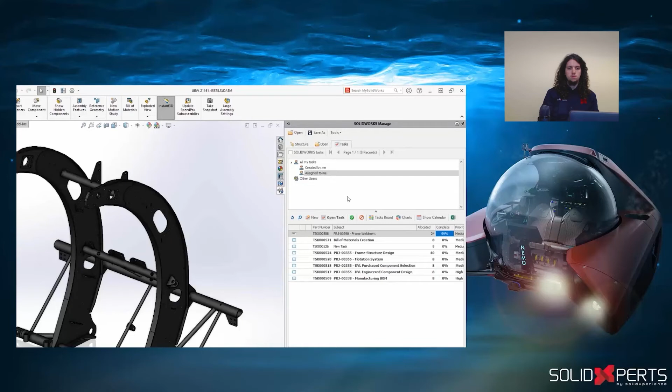Familiar tools like the task board are also available, with the added ability to create new tasks directly from the board.

From the structure view, selecting a specific component now shows any comments that have been made on the record, allowing users to see feedback associated with the design. New in 2022 is support for top-down bill of material design.

This assembly has 2 items manually added to the BOM, each with a quantity of 2. These 2 files now show up in a dedicated tab called Manually Added Files, allowing easy access for them to be placed in the assembly model. Once added, they turn red and can be removed from the list.

Uniquely serializing components provides important traceability, and capturing uniquely serialized components as linked records is a powerful capability of Manage. New for 2022 is the ability to reference the linked record BOM directly on the drawing. Additionally, these linked records are now just a right mouse button click away, providing quick access to supporting documentation like the Certificate of Conformance.

New in 2022 is the Manage add-in for Microsoft Word, Excel, and PowerPoint. This add-in provides convenient access to common Manage commands.

Document properties like the description of this Word document are easily added. In addition to referencing the active document properties, you can also access the properties from a completely different record, saving time and ensuring accuracy.

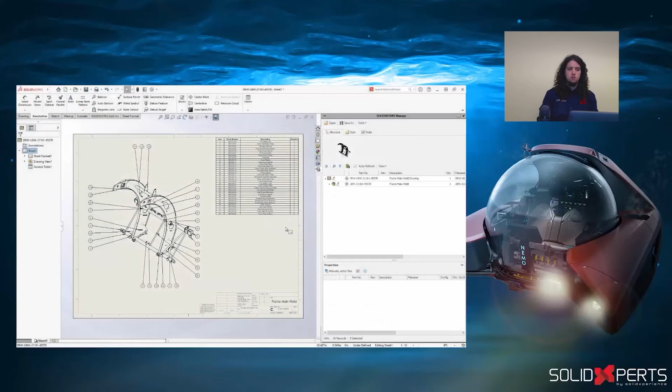With new ways to access, share, and document your designs, SolidWorks Manage 2022 takes the management of your product data to the next level.

So as we can see, there have been many enhancements done to the SolidWorks Manage suite with the introduction of SolidWorks and Manage 2022. We now have the ability to show the latest versions of BOMs, as well as being able to see more information about the custom properties and file properties of anything that's tracked with our managed system.

We've also been given the ability to sort by task order in projects, as well as getting more strength and more control over our timesheets to track time spent working on projects, as well as getting things out the door.

We then have added the ability to open attached files, as well as being able to see the automatic assignment of users or groups of users based off of inputs or from templates that we have created as our admin.

There's also been more features added for being able to control what happens when tasks are created or deleted, as well as being able to add notes to our tasks.

We've introduced some new administration tools to allow people to have better control over the users and their access to your managed system. So being able to control how they can interact with projects and when they can interact with projects, as well as being able to force the ability to remember or forget passwords upon sign-in to prevent users from leaving themselves permanently signed in on their computers.

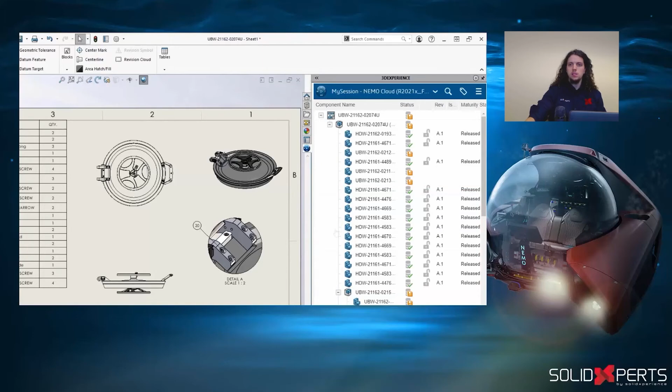The save dialog shows exactly which items require an update. You can also assign any item into a bookmark, such as related drawing files. Out of the long list of components like this, bookmarks are a convenient way to flag for easy access.

Only the new or changed items are going to be uploaded to the cloud. This makes efficient use of the network bandwidth, but still ensures that everything is up to date.

As the leader of the engineering team, Eric is able to release his own drawings. Easy-to-use lifecycle operations like this help the team avoid accidental overwrites.

Switching over to his Bookmarks tab, he then sets the related part and assembly drawings to be released. Currently, it's just 2 drawings, but as the detailing work continues, the bookmark will keep everything organized for quick access.

This includes any other supporting documents, such as this PDF instruction sheet and related SolidWorks Composer file. Most document types can be previewed interactively with the SolidWorks task pane. No need to be loading external viewing apps.

Eric also has a backlog of finished designs that need to be uploaded to the cloud. This can be automated by using a batch save, where he selects his local design folders and assigns them to the appropriate cloud space. SolidWorks, as well as the 3D Experience tools, will handle the rest for you.

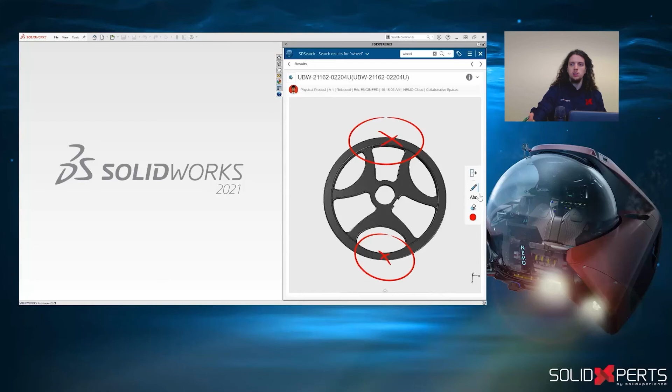This one looks right. Debbie uses 3D annotation tools to quickly sketch out a couple of ideas. From here, she opens the SolidWorks part in SolidWorks, and the latest version is automatically retrieved from the cloud.

Before she makes any design changes, it's best to do a where-used search. The hand wheel is used in one sub-assembly below the master hatch assembly. She can open that right into her modeling session and get to work.

This version of the subassembly is released. In order to make changes, Debbie needs to create a revision of the assembly and the hand wheel.

The status indicators immediately show the current assembly structure is out of date, so she replaces it with the new revisions and sets them to be reserved.

This gives her write access to the items she needs to modify without locking other users out of the rest of the assembly.

The redesigned handwheel looks great, but she needs to update the drawing. The shared bookmarks give Debbie quick access to related drawing files.

The drawing is now in sync with the part model, so she saves it to revision B. Then she sets the part and drawing to a frozen state so they can be reviewed.

Returning to the assembly, she finishes out the design by adding the latch mechanisms and saves the new revision back into the cloud.

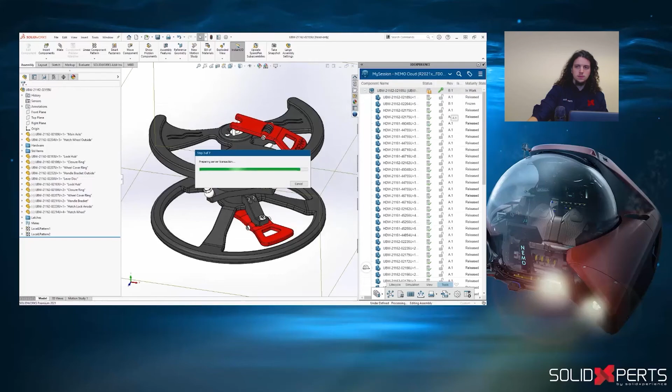In order to meet their tight deadline, the Nemo team often needs to work on the same design files at the same time. Eric is working on a new revision of the master hatch assembly.

These icons let him know that Debbie has the handwheel assembly reserved and is currently making changes. He can reserve the top-level assembly without affecting Debbie's work on the subassembly. This modular approach to access control allows users to design concurrently without accidentally saving over each other's progress.

A short time later, Eric sees that Debbie has finished up. He just needs to reload the latest version of the subassembly from the server. Taking a look at the handwheel drawing, he likes her redesign and moves it to the released state.

Back in the assembly, Eric attaches the connecting rod mechanism, then returns to his bookmarks to update the drawing. Bumping the assembly and drawing to Rev B, he is ready to save.

The revised hatch assembly requires new versions of supporting documents. From the convenience of the Bookmarks tab, Eric uploads the latest version of the Composer file and uses the interactive preview to inspect the latest revisions.

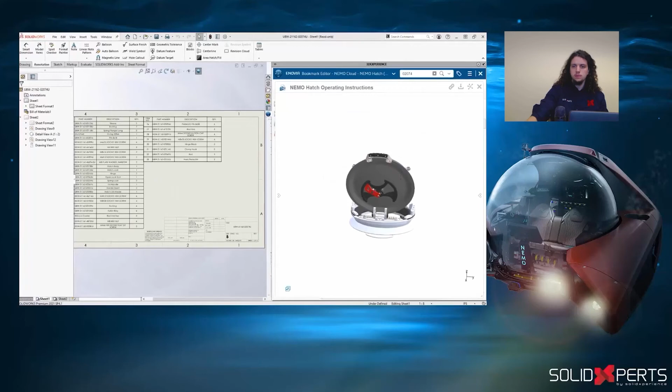Out of the box, Cloud Data Management enabled the Nemo team to be productive right away. They were able to safely store their data, manage changes, and design concurrently without ever leaving the familiarity of the SolidWorks design environment. Everyone in the organization benefits when you stay connected with SolidWorks and the 3D Experience platform.